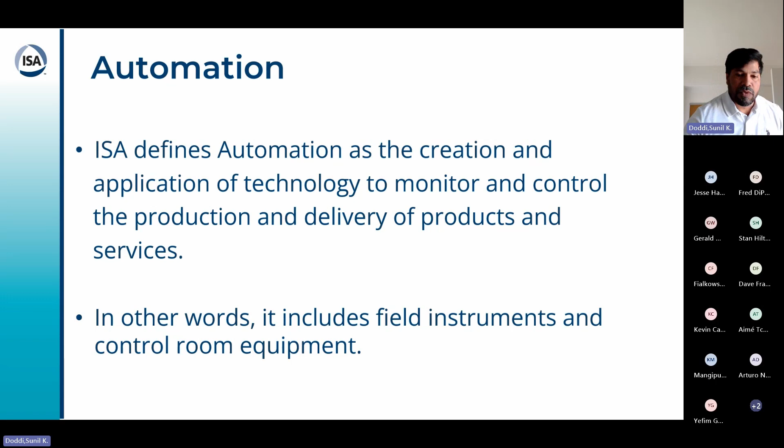So IACS versus ICS, from ISA 62443, which is a cybersecurity standard from ISA. An industrial automation and control system is a collection of processes, personnel, hardware, and software that can affect or influence the safe, secure, and reliable operation of an industrial process. That is the definition of IACS.

But I've never seen anybody using IACS. We all know it as ICS, industrial control system. It's a general word that we use. That's why I try to use the same word in the whole presentation. But it means the automation and the process instruments and also the control room equipment.

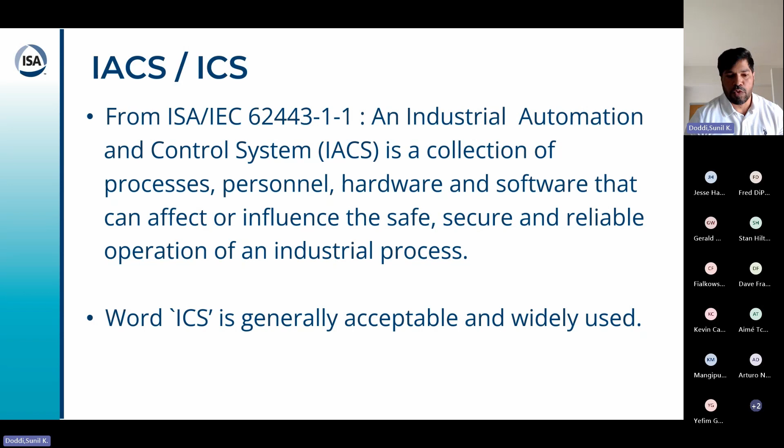So safety and security. ICS safety can comprehensively be functional safety and also cybersecurity. As I said, security is a subset of safety. So the primary objective is to be safe. That's why we also bring the security aspect into it, because we want to be functionally safe. So what is functional safety?

It is a system or piece of equipment that depends on automatic protection and operates correctly in response to its input, feedback, or failure in a predictable manner. This is a functional safety definition. ISA and IEC 61511 have a slightly different version of the definition, but for me, you need to specify a little more detail, like the feedback and the failure, and how the predictable manner and fail-safe actions happen.

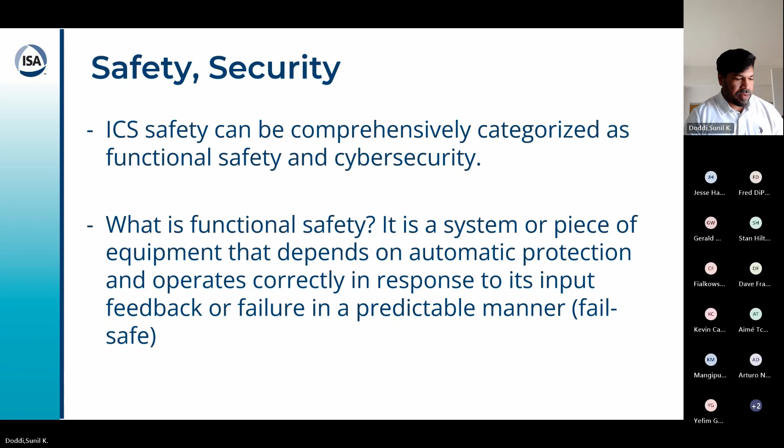So what is cybersecurity? There is no definition or description of cybersecurity in any of the ISA standards. So cybersecurity can be broadly categorized as an integration of cyber safety and physical security. So in our process industry, in our ICS world, cybersecurity does not imply just an internet connection. It's something beyond just an internet connection.

So functional safety and cybersecurity used to be considered separate until 2016. They were not really integrated into any of the standards. Since 2016, IEC standards brought the cyber safety aspect in to integrate it properly into functional safety. So now both are together. They're all integrated, both cybersecurity and functional safety.

So cyber risk assessment is required by IEC 61511 Part 1, clause 8.2.4. That means if you want to meet the 61511 standard, you have to perform a cyber risk assessment also on the safety system.

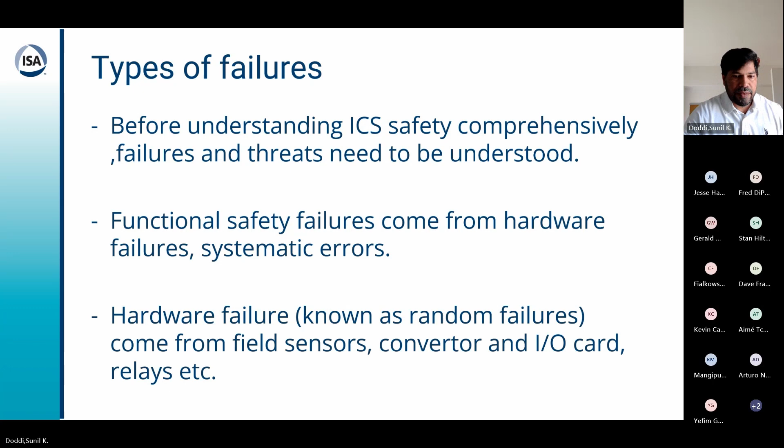What are systematic errors? Systematic errors are design faults that could arise from documentation errors, wrong specifications, operational procedures, or the manufacturing process. These are all called systematic errors.

You could also say hardware failures are systematic errors, because why would a hardware failure happen in the first place? There was something wrong in the design. You could call it a systematic error, but they should be kept separate. You can't treat them as the same failures unless you make sure the design changed and that eliminated the hardware failure. So both failures are completely different. They're not the same.

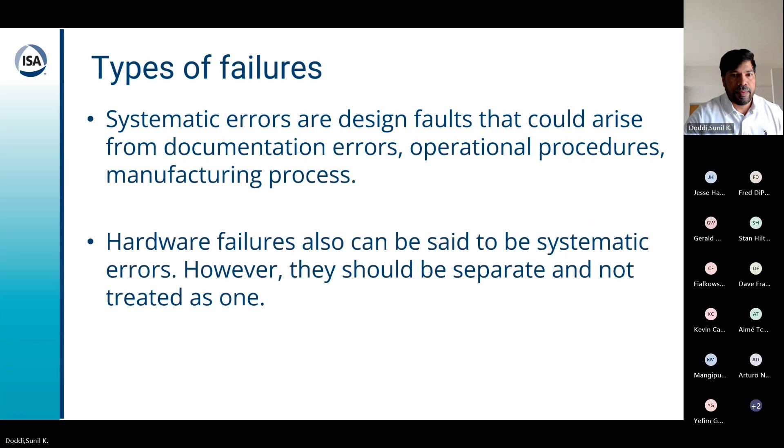So what are cyber threats? Cyber threats can be external or internal, and can also be categorized as deliberate or accidental. Typical external threats are hackers, professional, amateur, or script kiddies, rival business competitors, and nation states. Typical internal threats are erroneous actions, inappropriate behavior by an employee, or insider threats.

So safety and security, how are they interlinked? Both actually depend on exactly the same three processes. You perform a risk analysis, whether it's safety or security, then you implement or address your risk analysis outcome, and keep on maintaining and improving. Both safety and security depend on the same life cycles.

So what are the safety related standards? Governments and industry organizations are developing safety and security guidelines to help the industry, and they make a lot of recommendations. For functional safety, we have ANSI/ISA 61511, which is also IEC 61511. ISA adopted IEC 61511, so that's why it is all one standard now.

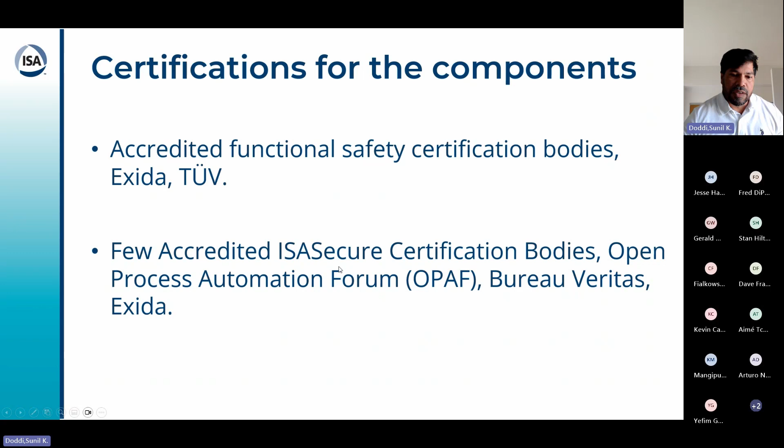So now, if you look at clause 5.2, it specifically says the vendor must have their own functional safety management plan if they claim functional safety for their equipment. That means if you're using a functionally certified component from your vendor, they need to have their own functional safety management process. So no one can claim a functional safety certification without having any functional safety management from their side.

As an asset owner and the end user, you should have your own functional safety management. If your vendors have their own FSM, that does not mean it's directly applicable to you. You should have your own FSM.

And clause 5.2 of FSM says personnel who are working on the safety instrumented design must be competent. This is highlighted in the recent standards since 2016. So that means those who are working on this design must be very well versed in what they're doing. That does not mean the competency needs to be trained externally. The person can be trained either externally or internally, but that needs to be documented.

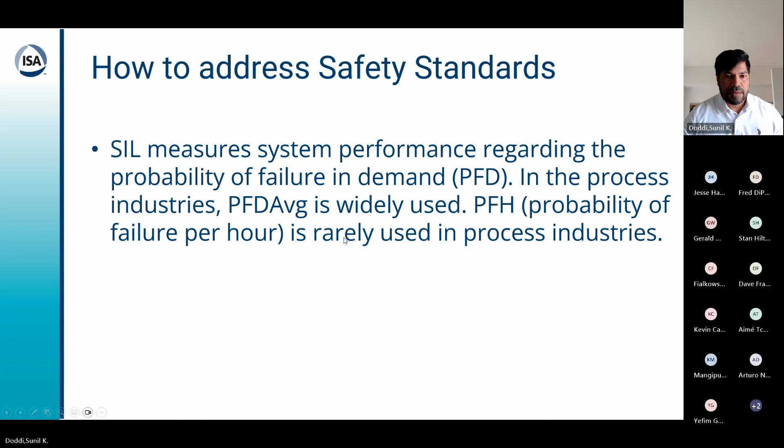So SIL 1 means you can claim a risk reduction between 10 to 100. If it is SIL 2, it should be 100 to 1000. That's the risk reduction you can claim.

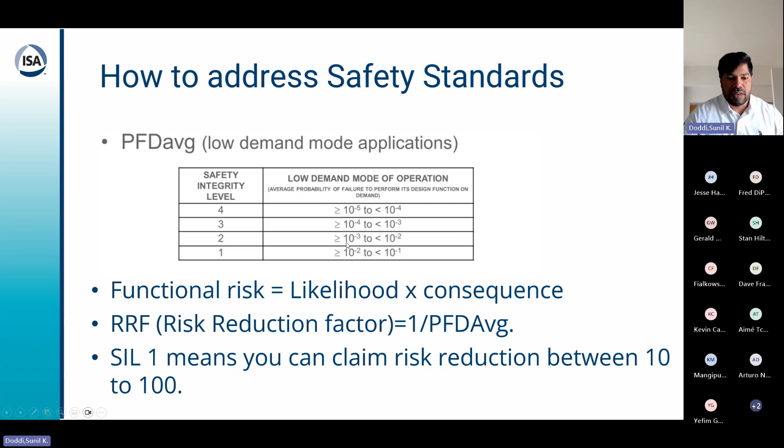Is a safety PLC mandatory? The standards do not really call for a safety PLC. It is not really mandatory to use it. It depends on how your safety assessment comes up with different recommendations.

So in some cases, based on the design of your processes and available instrumentation and how you implement the controls, you may not even need a SIS, because when you're using a BPCS, a basic process control system, you can claim a 0.1 risk reduction. So if your risk assessment says 0.1 is enough for your whole process, then you don't necessarily need a SIS. But you need to perform the functional safety management process before concluding you only need 0.1 risk reduction.

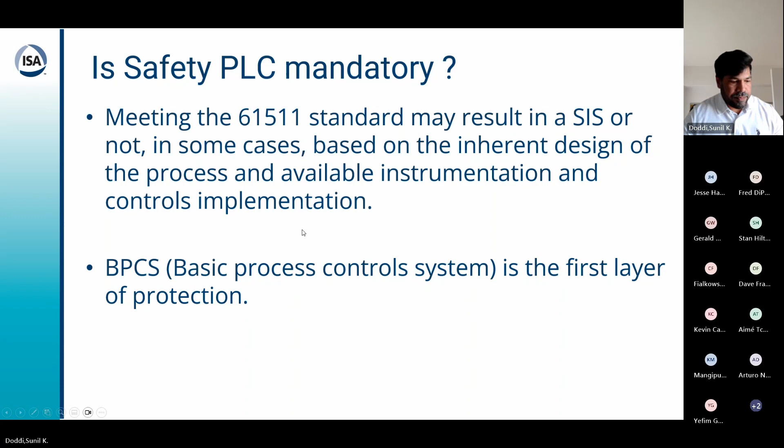So as I said, it's not mandatory to use a safety PLC. If you end up with a safety system through your risk management, you can also do a hardwired design. It's not mandatory that a safety PLC is required. IEC 61511-1 clause 3.2.67 says SIS may include software. We do not mandatorily say you need software to meet the standard. So this means you can use a sensor and simply a hardwired design with relays and everything. You can still meet the standard as long as you make sure you're meeting the risk reduction.

But the problem with the hardwired design is it usually brings up complex wiring. If you use just sensors and relays, there are too many wires going here and there, and then it's very hard to troubleshoot. And it's also a little cumbersome to design in the first place. So if you use a safety PLC, it makes things a little easier, because the instruments and the PLCs have good diagnostics. So it makes things a lot easier if you prefer to use a safety PLC, but it's not mandatory.

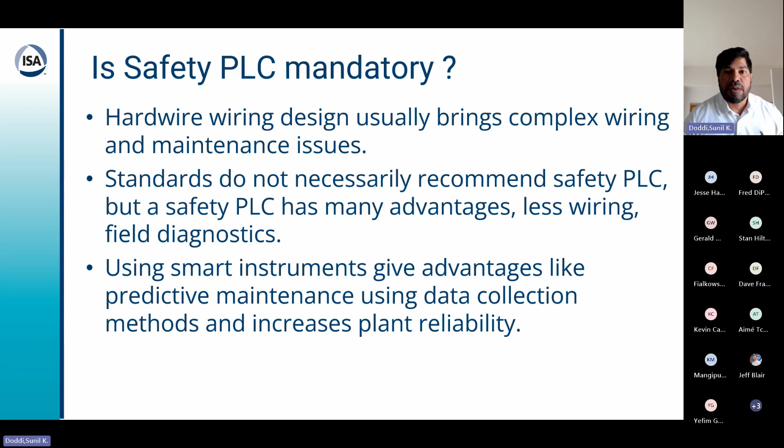And also, if you use smart instruments with HART diagnostics, you can get a lot of diagnostics out of the instrument and use that for predictive maintenance and data collection, and increase your plant reliability. So it's preferred to use smart instruments, but it's not really mandatory. You can still meet the standard using a hardwired design, but it brings a lot of complex wiring into your plant.

Is SIS just enough? Once you perform your functional safety management and you come up with a SIS, is it just enough? No, it is not enough, because as we already saw in the last slides, to meet the standard you need to perform a cyber safety assessment. Simply having a SIS does not mean you're protected from cyber security attacks, because attacks can also happen on the safety instrumented system itself.

Also, not having an SIS does not mean cyber safety is not required, as BPCS independent protection layers can get compromised and then compromise the safety of the plant. Because when we're doing the functional safety assessment, we already claim a BPCS risk reduction of 0.1. So if you don't properly perform a security check on the BPCS, that could also affect the risk reduction factor you already claimed. So not having a safety system does not mean you don't perform any cyber risk assessment on your control system.

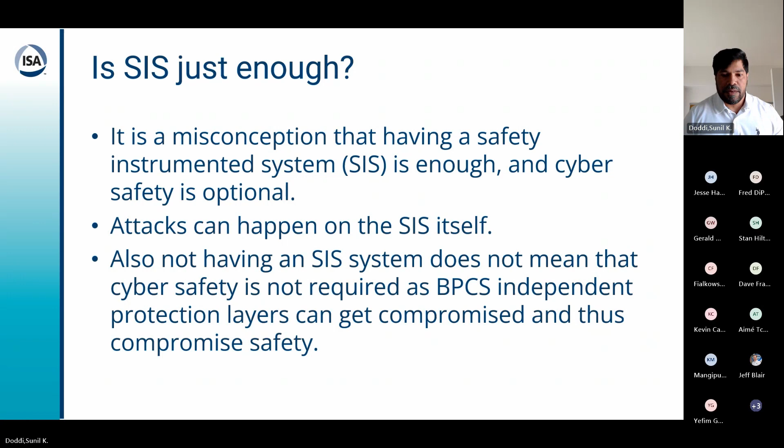Now, what is the systematic capability? Systematic capability and failure data are highlighted in the certification by the accredited bodies. If you see any exida or TÜV safety certification, they specify the systematic capability, like SIL 2 or SIL 3. It's also called SC. If any component is SIL 3, you can use that component at anything up to SIL 3. You cannot use it higher than what is specified on the certification. If a component is specified as SIL 2, you cannot use it in SIL 3, only SIL 2 or below.

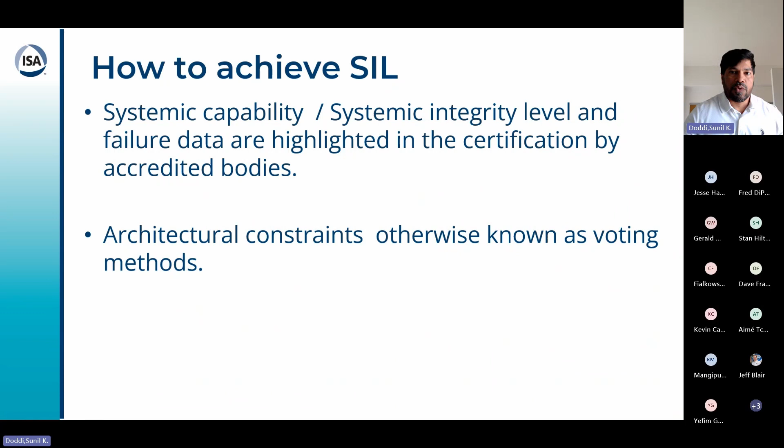So the other component there is the architectural constraints. Architectural constraints are also known as voting methods.

What are voting methods? Classic voting methods are 1oo1, 1oo2, 2oo2, and 2oo3. So that means one sensor failure is taken into account for the risk reduction. Here in 1oo2, we have two sensors, but one of them is considered for safety risk reduction.

And there are other voting methods available, which are called diagnostic-based methods, which are 1oo1D, 1oo2D, and 2oo3D. So D here means the diagnostics. You're taking advantage of diagnostics in this method. In classic voting methods, we're not taking advantage of any diagnostics. We'll see in the next slides how we can properly use the diagnostics. This is a very interesting one.

Why do we need diagnostics? Because diagnostics can improve the safety and reliability of the fail-safe circuit. Diagnostics are normally achieved through a HART system. But HART is not a safety system. So that means whatever information you get on your HART system, you can use it for diagnostics, but you can't use it in a safety circuit.

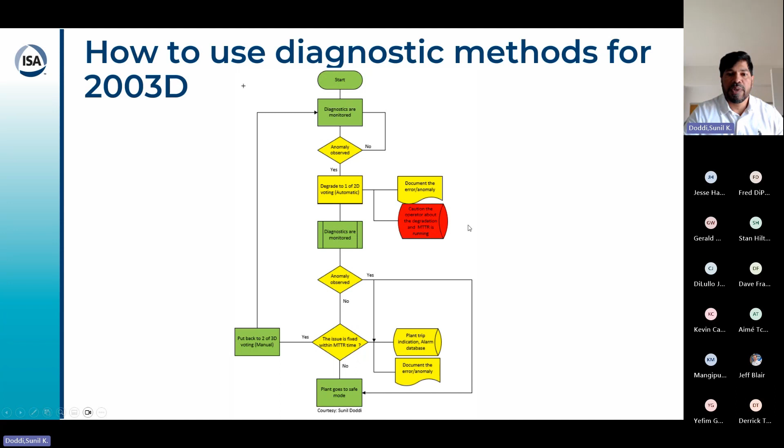This could be an alarm. You can put an HMI alarm saying, hey, the MTTR time is running now. Go and fix the instrument or take the actions required to fix the instrument. But you still want the diagnostics for the rest of them, 1oo2D here. And if you see an error for any of the 1oo2 instruments now, then the plant should go to a safe mode, because now you don't have any protection for the plant.

Because during the SIL calculations, you decided we need 2 instruments to keep the plant safe. So that's why even in 1oo2D voting, the plant goes to safe mode, because now it becomes 1oo1 voting. If you see any error in 1oo2D, that means you don't have the 2 instruments which you concluded during your SIL calculations were the minimum requirement to keep the plant safe.

So if the issue is fixed within this mean time to repair time, then it goes back to 2oo3D voting, and as usual the plant runs nicely. If the issue is not fixed, then the plant should go to trip, and the trip is shown as green because it's assumed that you have done proper functional safety management, and it goes to fail-safe mode. It's not really a danger, but it should be going to a safe mode, fail-safe mode.

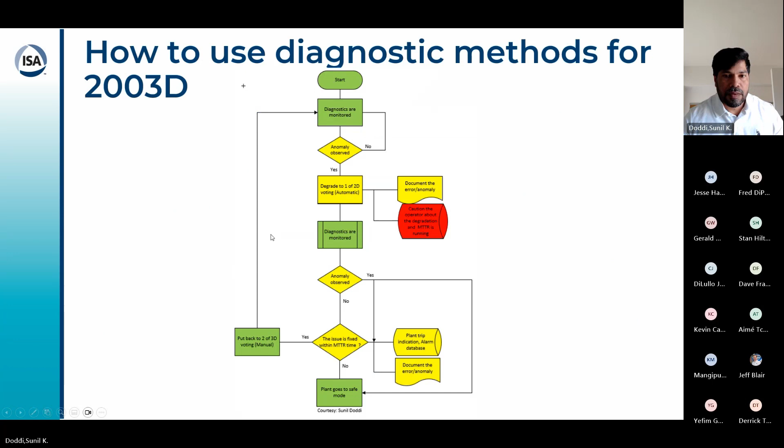So now during SIL assessment, if you end up with SIL 3 targets, what can you do? SIL 3 targets are very hard to achieve because they need frequent testing. So that's why you can bring up a partial stroke testing method. It's a very different method than the 1oo2 for SIL 2 and SIL 1. But partial stroke testing brings complex design changes, like new bypass lines for the testing, and very complex partial stroke testing equipment. So if you end up with SIL 3 during your SIL assessment, you'd better consider other protection layers to bring it down to SIL 2 or SIL 1, because SIL 3 is very hard to achieve since it needs very frequent testing.

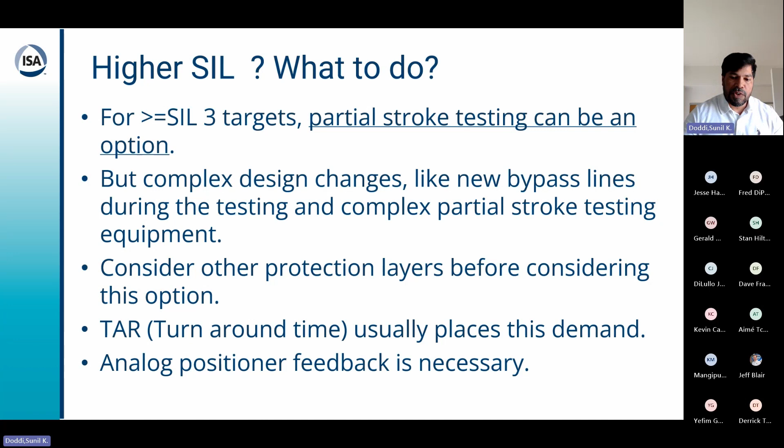One of the reasons you could end up in SIL 3 is a long turnaround time; that means you don't want to stop your plant for 4 years. In one of my old companies, they didn't want to shut down the plant for 4 years. That means you cannot test any of the functional safety equipment for 4 years. So that makes it very difficult, and that's when you could end up with SIL 3 level targets. So in partial stroke testing, analog positioner feedback is necessary. We'll see why here. So what is the partial stroke testing overview?

It basically monitors the valve movement. Not a complete closure, but it just observes if the valve is moving properly, so it's not stuck up. So that's the main point of checking partial stroke testing.

So normally you initiate the partial stroke testing, whether it could be auto, you can program it, or you can do a manual also. That means on a certain specific time you want to execute this test, like 6 months down the line on this date you want to execute this test, you can program it, or you can also manually execute partial stroke testing.

So in this partial stroke testing, the program observes that the valve is ready. That means is there any interlock stopping it from moving this valve a little bit; all that you need to program in your PCS. If the valve is not ready, then the test is inhibited, and then you check what is the next procedure on why the test is inhibited.

If the valve is ready, then valve stroke is initiated. Not a full stroke; it's just only very partial movement of the valve, and the valve movement is measured. When valve movement reaches the PST set point within the expected time interval, that means your partial stroke testing is successful.

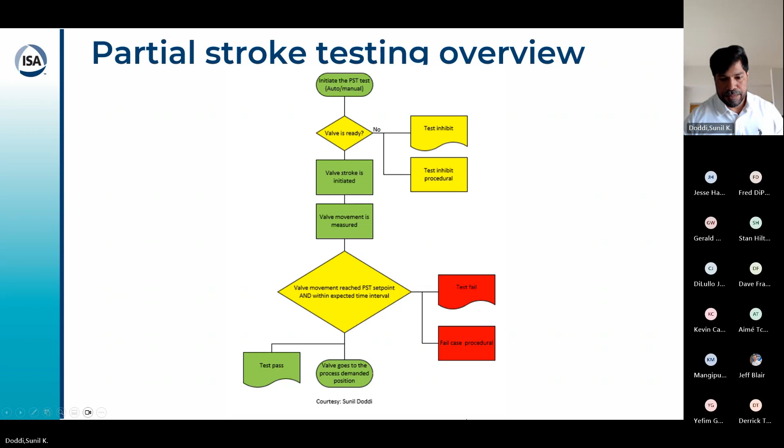There is something wrong. So that means when actual demand happens on the valve to close the valve, the valve may not close completely. So the test is actually failed if you do not reach the set point within the test interval that you already defined in your program. So that's a little bit about the functional safety there.

Now we'll see how to address cyber standards. Cybersecurity standards and best practices. As I said, it's all qualitative, not really prescriptive. They don't tell you exactly, do this one and you're good. So ISA/IEC 62443 is a very good standard. Very well written, very easy to understand.

And then they assigned security assurance levels 0 to 4 in the standard, which is something similar to our functional safety SIL levels. Much similar, not really exactly the same, because in the SIL levels, there is the probability of failure on demand and the risk reduction you can get out of it. But security assurance levels are all qualitatively assigned. That means there are no numbers around it. We'll see in the next slide why we could not assign numbers there.

So these are all qualitative words. It could be low, medium, or high. So your security assurance level is low, medium, or high. That's how these are defined in the IEC 62443 standard. There are no numbers assigned to it, so you can't simply say, hey, this is my risk reduction, I made it, and I'm good. That's not how it works in the security standards.